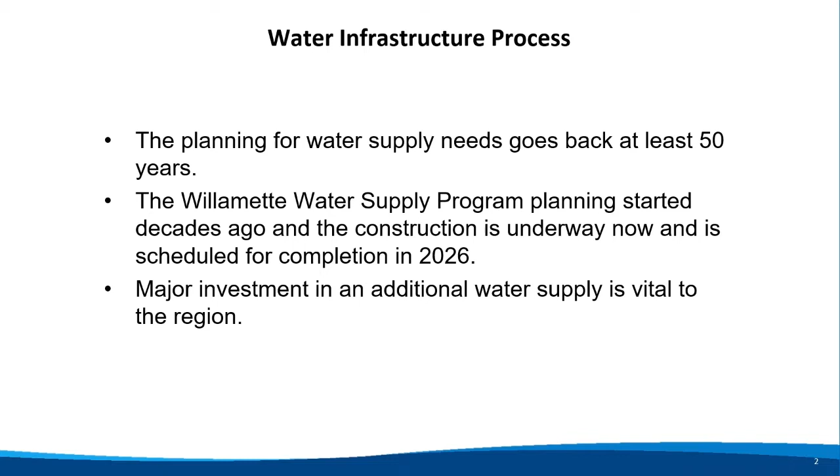Of course, one of the big surprises delivered in 2020 has been COVID-19, and that has been and is going to continue to put pressure on us at the individual, household, and community level. The benefit of having partners in a project this size is shared risk, and we are working closely with the City of Hillsboro and the City of Beaverton to respond to the challenges COVID-19 has presented.

COVID-19 has largely impacted our water sales and thereby our revenues. So while we've had a lot of benefits in the re-executed WIFIA loan, the reduction in revenues as a result of COVID-19 has been and continues to be problematic, and an unforeseen situation that I don't believe any of us could have envisioned.

The board of directors and the staff take their jobs very seriously, including our fiduciary responsibility of spending public dollars. We recognize that the events which stacked up since last March have placed significant strain on our economy and have put many of our customers in a very difficult financial situation.

We have taken many actions to reduce our expenditures at the district while preserving our ability to move forward with projects that put us in a strong position in the recovery. To date, we have reduced our expenditures in this budget cycle by approximately $10 million. All of the leadership and board of commissioners is working to reprioritize our investments in the district's budget.

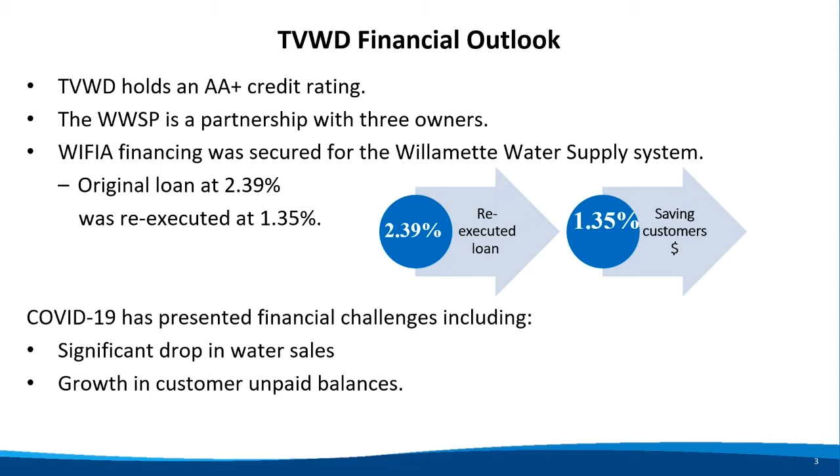Currently, about 1,800 customers owe $768,000 on their water and sewer bills.

We recognize these are difficult and uncertain times for everyone. We are doing all we can to ensure we can continue to deliver water to all of our customers at the lowest possible cost.

While no one is excited about the need to do rate increases, it needs to be understood that the increase is needed to pay for the Willamette water supply program that we can't stop due to numerous contractual commitments made long before COVID-19 hit us the way it has.

The Willamette water supply project remains and will remain for several years to come the biggest ongoing cost the district faces. And while it is never popular to raise rates in any industry, it is important to maintain perspective.

This natural resource is being delivered to your residences and businesses 24 hours a day, 7 days a week, at a cost of about 1 and 1/4 penny per gallon. There is no other natural resource delivered to any of us at such a low cost.

At this point, I'm going to turn this presentation over to professional engineer David Kraska, who is our project director for the Willamette Water Supply Program. David brings decades of experience and a wealth of knowledge that is needed to successfully deliver this large investment for the district, for the region, and its partners. Take it away, David.

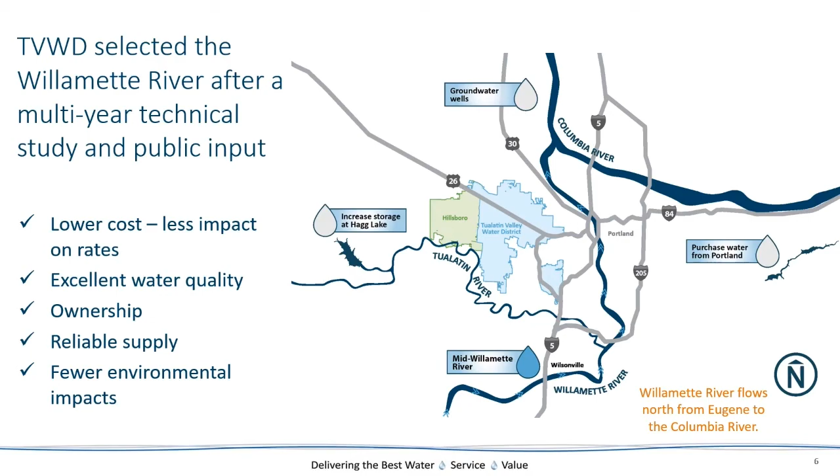Once the decision was made to go to the Willamette River, we had to create what the program entailed, essentially all the different component pieces of it. This is a very high-level summary of it.

There's an existing intake to the Willamette River that supplies water to the Willamette River Water Treatment Plant. We are currently modifying that intake, expanding it and making it more seismically resilient. We're also going to be constructing a new water treatment plant in the eastern portion of Sherwood, right up against Southwest 124th Avenue.

We'll be constructing more than 30 miles of large diameter pipeline. The largest diameter is 66 inches and the smallest is about 48 inches. We'll also be constructing 2 water storage tanks, pretty large tanks, 15 million gallons each, up on Cooper Mountain. The total estimated cost for this whole program is about $1.3 billion.

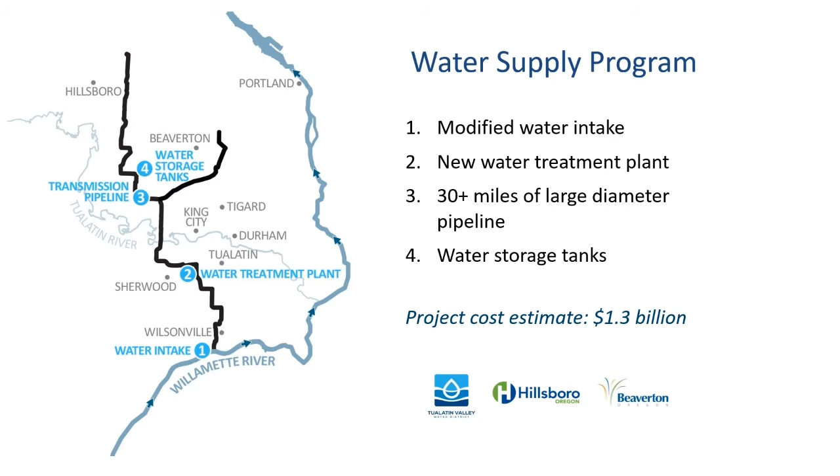One of the most important is maximizing competition on our contracts. For all of our design contracts, all the consultants we hire, all of the construction contracts, we try to make it so as many different firms can compete for our work as possible, because we think that's critical to drive costs as low as possible.

Some techniques we use: right-sizing the projects to make sure we get as many contractors bidding on our work as possible, outreach to make sure as many contractors as possible are aware of our work, and quality designs to make sure the designs we put out for contractors to bid on are high quality, clear, unambiguous, so contractors know what they're in for when building our projects.

We also employ continuous value engineering through the whole design process and also during construction, constantly looking for ways to get the same value and results at lower cost. Commodities tracking, tracking steel, concrete, and timber prices, to find out if we could take opportunities for dips in prices.

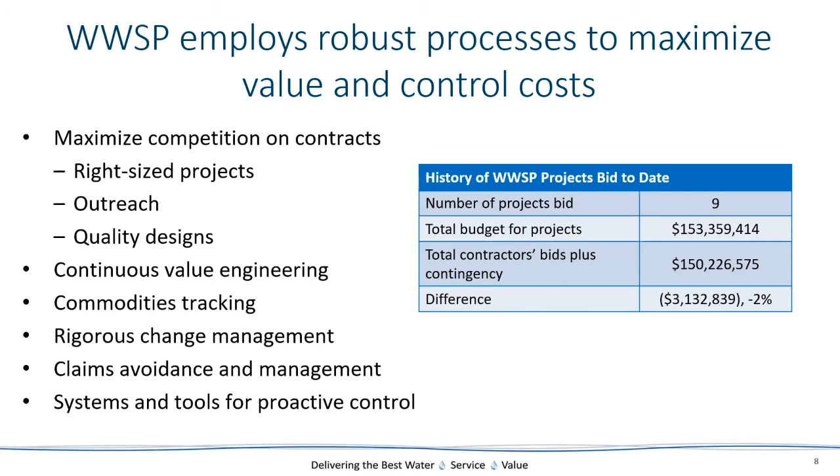So what are we doing on the program? We're building a secure drinking water system. What we mean by secure is secure from a public health standpoint, making the highest quality water we can with available technologies, and protecting that quality all the way to the connections with distribution systems. Secure also means secure from seismic effects and other natural consequences, so the system is reliable even after those events. We're preparing for the future to make sure the system lasts a long time and can be expanded, right-sized for the time.

And improving our economy. This is another thing TVWD CEO Tom Hickman mentioned, all the jobs this work creates and will continue to create.

Finally, water conservation will continue to be a priority. That might seem counterintuitive for an agency in the business of selling water, but if we weren't in that business, we'd have to build an even bigger program. So conservation is a continuous priority for us, to make sure we're making sound use of the resources available to us.

So regarding supporting our economy, what does that mean? To date we've spent about $200 million, and 95% of that has gone to local employees, goods, and services. The pipeline being constructed here is from Northwest Pipe's fabrication facility in North Portland. Almost all the pipe installed on our program has come from that local facility, and all the contractors, many consultants, subcontractors and so on that we've employed are local.

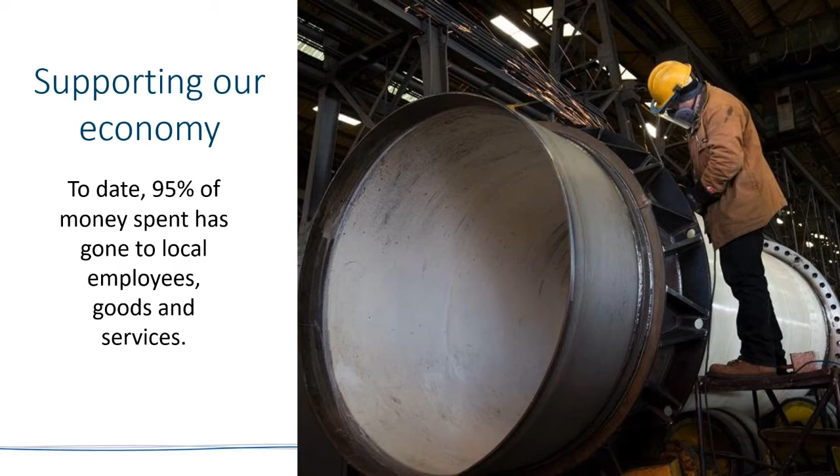That brings me to the end of my presentation. I'd like to introduce Andre Tolman, our construction manager for the overall program, overseeing all the construction work going on to date. He'll bring you up to speed with what's happening now. Take it away, Andre.

Thank you, Dave, and good afternoon everybody. I love talking about construction, so we'll see if we can get through this efficiently.

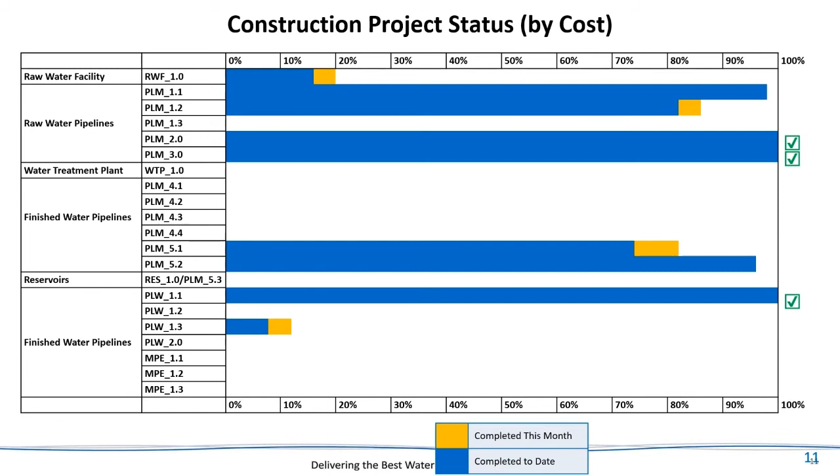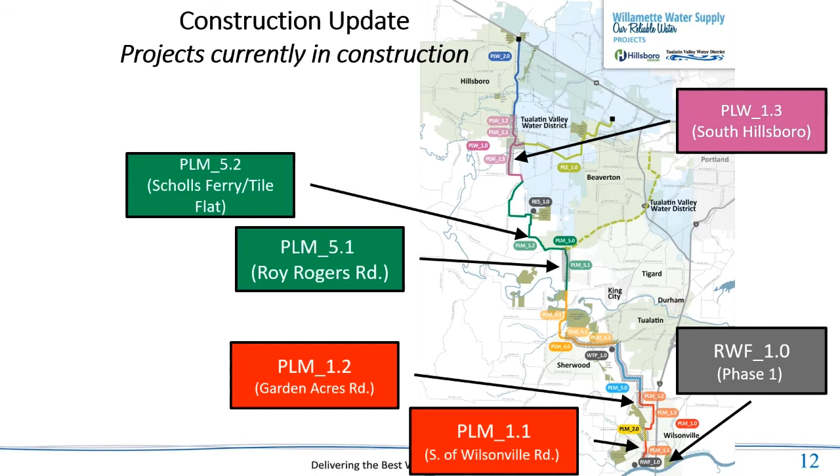The first project I'll talk about is the raw water facility project, known as RWF 1.0. The contractor is Kiewit Infrastructure West, designed by Black & Veatch consulting engineers. The total construction cost for this phase 1 project is $49 million and change. The schedule shows it started in June of last year and will continue through February of next year.

The major activities for this project include seismic soil improvements at the existing pump station, foundation piles for all the new structures, a 66-inch raw water pipeline through this site connecting to the future raw water pipelines, as well as structural modifications to the existing pump station. I'll talk more about some of these activities in the coming slides.

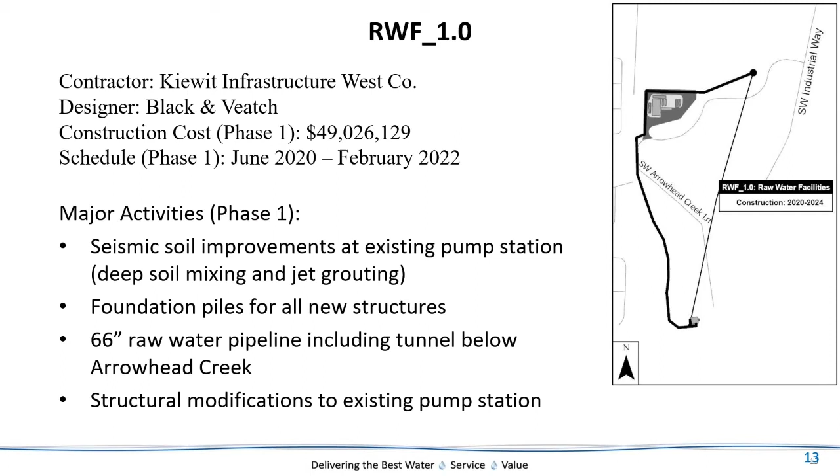All right, so we all like photos. Here's a good photo of the part of the project known as the upper site.

That site where you can see those cranes and most of that activity will be a future building that houses all of the electrical and mechanical equipment needed to run the pumps, which will pump water from the Willamette River up to the treatment plant for treatment.

On the right side of the photo, you can see two very large, tall, yellow drill rigs. Those are drilling shafts for a tunnel that the pipeline will go under beneath Arrowhead Creek, which could not be done with a typical open cut method. Next slide.

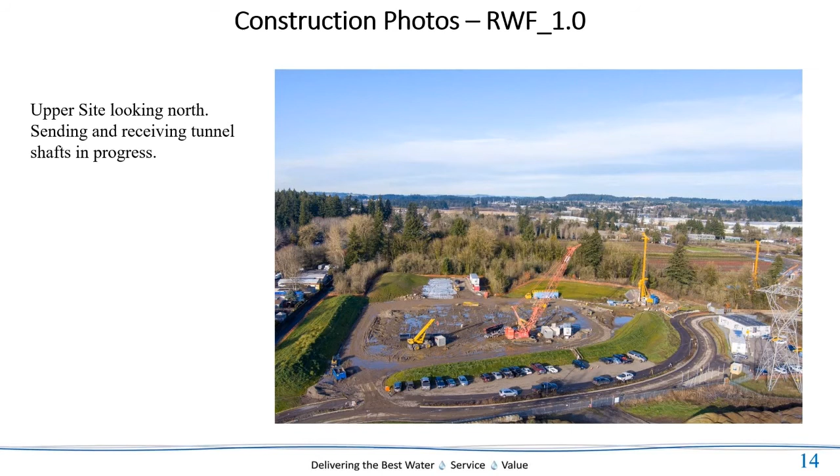In an earthquake, a very large seismic event like a Cascadia subduction zone earthquake, it's expected that this riverbank, because of the slope and the soils there, might tend to slide towards the river, and it'll destabilize all of those pumps inside and potentially shut them down.

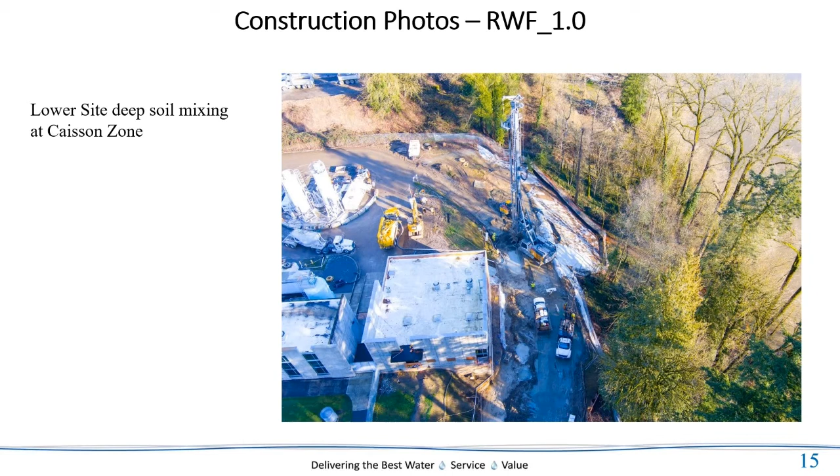So what's being done on this project is this deep soil mixing, improving all of the soil immediately adjacent to that pump station by mixing in cement into the soil, so that it really limits the amount of movement that slope will have in a seismic event. Next slide.

Now I'm going to move up to the next project. It's called PLM 1.1, one of our pipeline projects. It actually connects onto the end of the pipeline from the raw water facility project down in Wilsonville, just on the other side of that creek where they're tunneling.

You can see the contractor and designer information there. It's a little smaller project at $2.7 million, but it was important to get this project done in this time frame of 2019 to 2021, because the city of Wilsonville is building a road and doing some other sewer and water work in this area, and we wanted to make sure we didn't conflict with those two construction projects at the same time.

This project basically includes the 66-inch diameter raw water pipeline, another crossing of a creek, Coffee Lake Creek. This one was done by open cut rather than a tunnel. We had to cross below BPA power lines, high voltage power lines, had to cross below another large water line, a 63-inch water line that feeds Wilsonville and Sherwood, as well as repair some concrete road panels. So a smaller project, but had a lot of technical challenges to it.

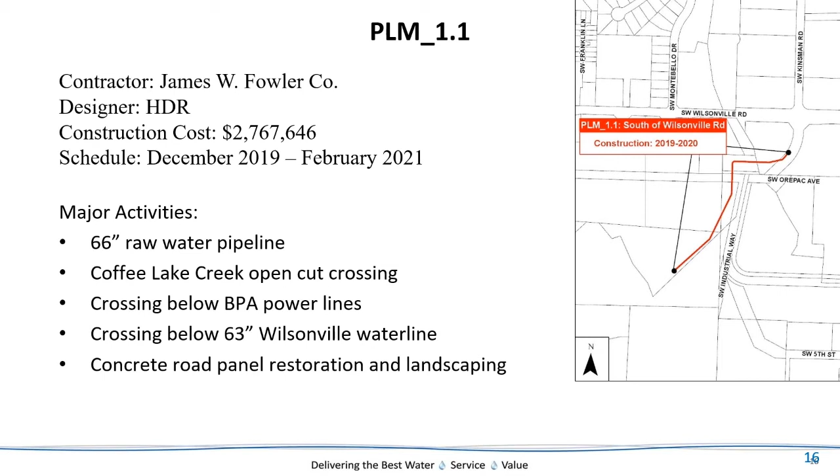Here's a photo of some of the activity on the site. Down in the foreground, you'll see that creek - that's Coffee Lake Creek. During the summer, the contractor was allowed to put a small dam in there and pump the water around. Back in the summer, the water level was much lower.

And so there was an in-water work window to protect aquatic life in that creek. They actually trenched down about 20 feet below what you can see that water level there in the dry, and put the 66-inch pipe underneath that creek, and then crossed that road by going halfway across and bypassing traffic, then moving traffic back over and continuing on.

So a lot of technical challenges were involved in this project. Next slide.

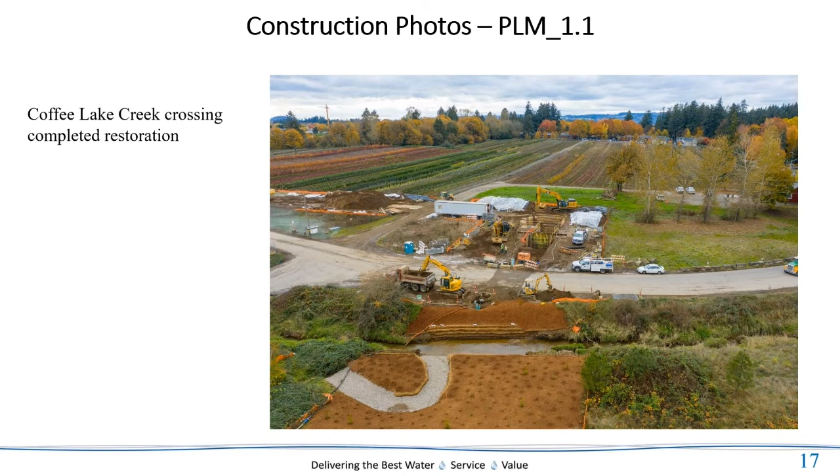Again, here's just an overview of that kind of 1,300 feet of pipeline. You can see it went through this nursery area and the existing roads. Those roads are used by Wilsonville Concrete and Orepac, a major building material supplier. So there was a lot of truck traffic that had to be negotiated on this project.

But as of now, it's all restored and headed towards final completion here next month. Next slide.

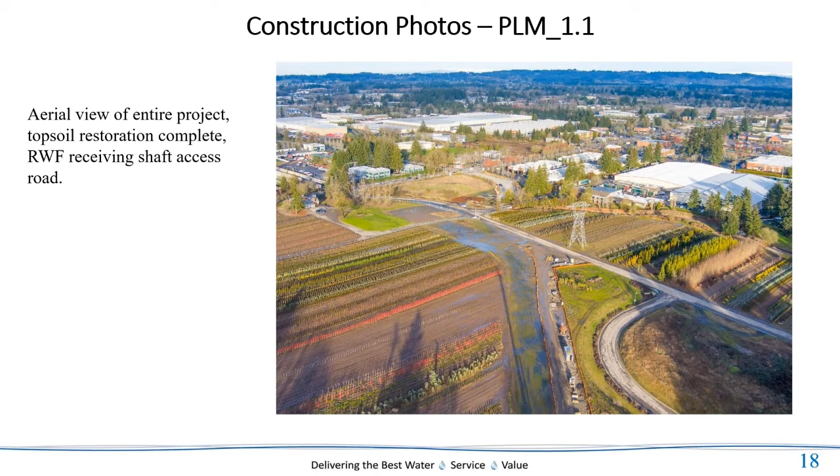Now this project is called PLM 1.2. This was a partner project, and you can see on the top of the slide we list a partner, City of Wilsonville. So the city wanted to build out Garden Acres Road.

It was a very narrow country lane, and as the city planned for more development in the area, they wanted to widen this road. So knowing that our very large 66-inch pipeline had to go through this area, we partnered with the City of Wilsonville to have one construction contract where the pipeline and the road construction could be done at once. This saved both agencies quite a bit of money.

The major activities on this project include the 66-inch raw water pipeline, and another tunnel below Day Road that can't be done open cut because of other utilities in the roadway and traffic concerns. We're also tying into the PLM3 pipeline, which was done back from 2016 to 2018. And then what we call Schedule A road work, that's all the street work the City of Wilsonville was having done.

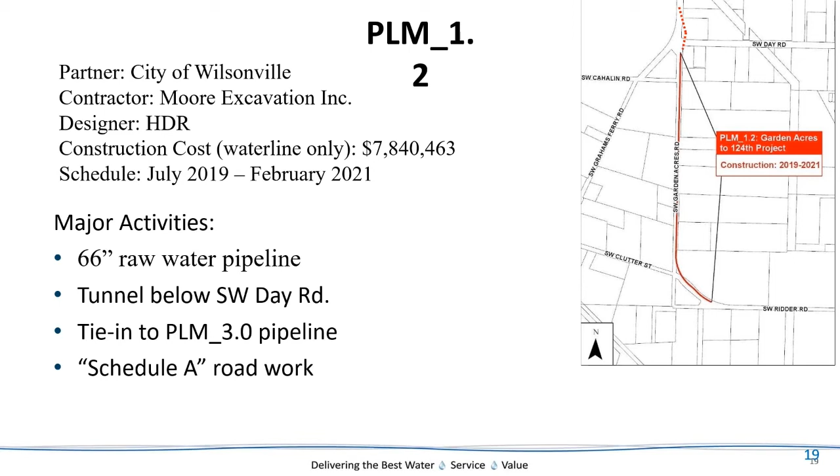Here's an overview of Garden Acres Road. As you look at this photo, you'll see that light gray concrete pavement - those are the limits of the road the city wanted to complete. There's the land that will someday be a light industrial development in Wilsonville. This is what's known as a half street improvement, so it'll eventually be a wider road, but for now there's 2 lanes, planter strip, sidewalk, bike lane, etc.

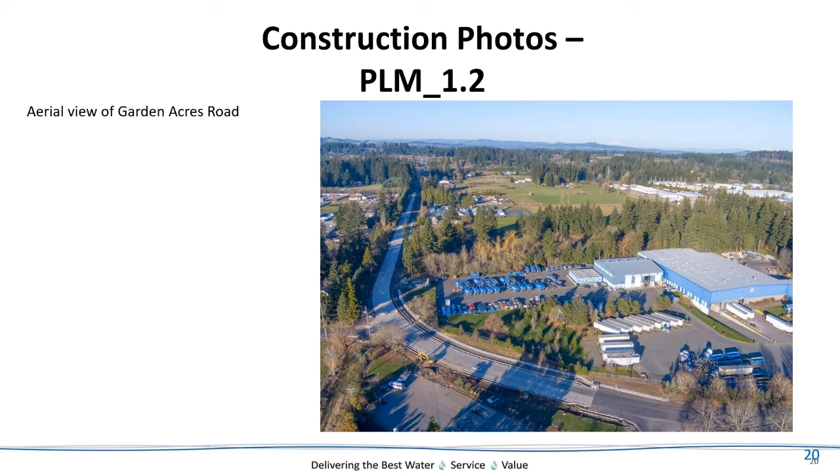This makes it quite evident why it was important to get the pipeline done before the road was built, so we wouldn't have to come back later and tear up existing pavement. It was a good move for both agencies to save money, doing it under one contract where we only had to pay one contractor and the associated overhead and disturbance to the public.

Now here's a photo of our 66-inch water line going in. You can see it takes up quite a bit of room in that road, and this Garden Acres Road really was a small lane that's getting widened out. The shoring and large equipment and the depth of our pipeline is quite impressive, so it takes up quite a bit of area as it went forward.

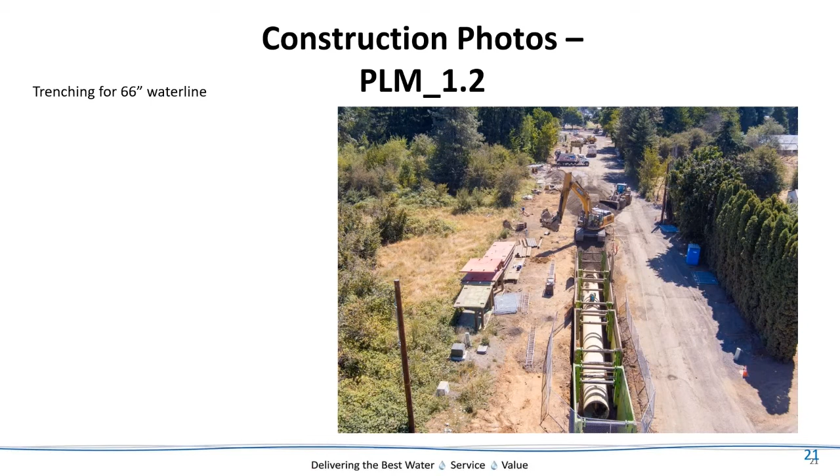As the pipeline got done, the contractor came behind and started grading out and paving the road.

We had another partner project, this time with Washington County. As some of you know, the county is widening Roy Rogers Road. The idea was the same: we would team up and do the project together to save money for both agencies.

The major activities on this project were our 66-inch finished water pipeline, with a T connection for the 48-inch future Metzger pipeline. There was a tunnel below an unnamed water body we call Tributary 3, and another temporary connection to the City of Tigard included in this project, as well as Schedule A, the county road work. Our waterline work is known as Schedule B from the contractor's perspective - a widening of Roy Rogers Road, including a bridge widening over that Tributary 3.

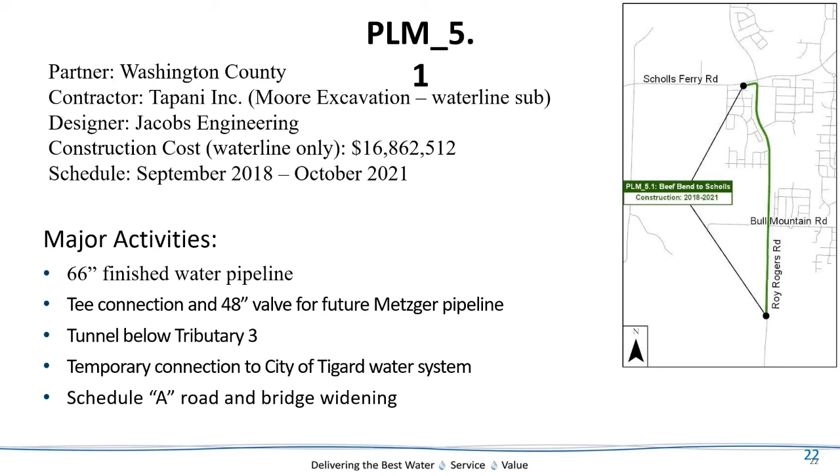Next slide, so we're going to look at some photos. This is an overview of Roy Rogers Road looking north. You can see there's a lot of development happening in this area, a lot of new housing construction, and the widening of the road.

Again, we're putting our pipeline in before that paving gets done. You can see where our pipeline is going in there on the side of the road. Eventually 2 more lanes and a bike lane will be put over the pipeline in that area.

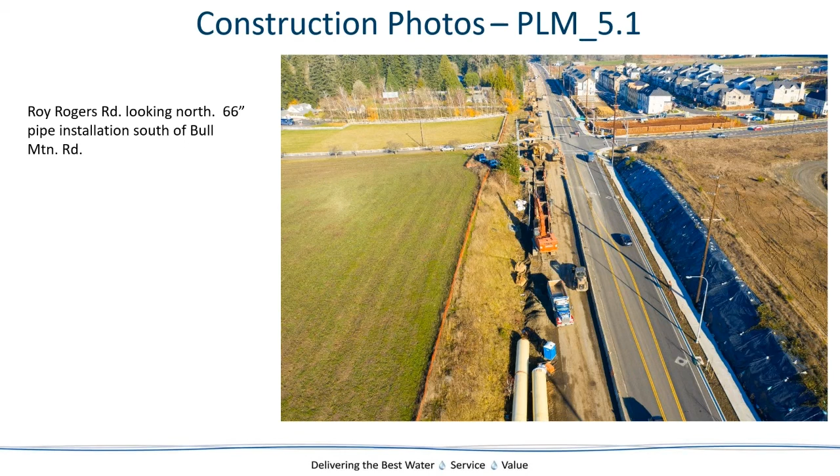This is a photo of the shaft, one of the shafts for the tunnel which went under that Tributary 3. It sounds pretty insignificant, but it was a very deep valley with a creek down at the bottom, so there's really no way to do it digging from the surface. We had to do a tunnel under that creek.

This shaft you see here is called a secant pile shaft. Essentially, the contractor drills in those little circles of concrete all the way down 60 to 70 feet. When they're all connected together, it forms a compression ring, making it safe to go down to the bottom and work in there. So they excavate all the soil out from inside and then put their tunneling equipment down at the bottom, doing the same on the other side so the tunnel equipment has a place to exit.

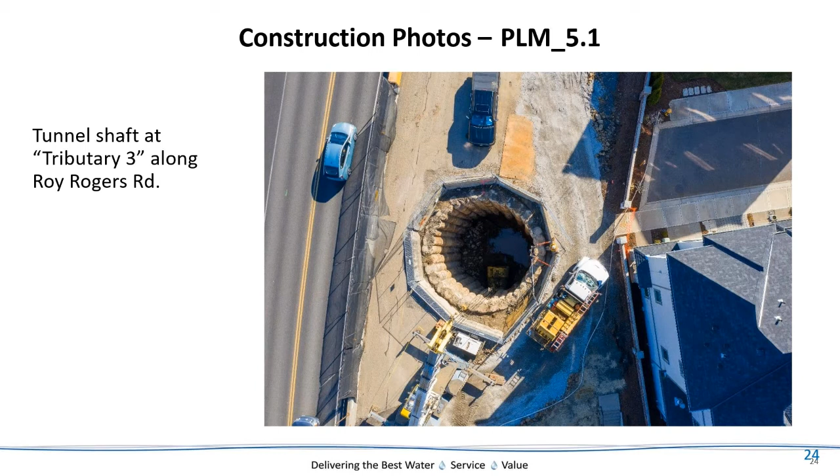Moving right along to our next project, PLM 5.2. The little map graphic shows where this is. It's on Scholls Ferry Road and Tile Flat Road, and then a little bit onto Grabhorn Road.

This project is nearly complete, about 99% done. The schedule shows it ending February of 2021, next month. The major activities were the 66-inch pipeline going in for our finished water, and there was another shorter tunnel below Scholls Ferry Road, along with a lot of coordination with developer projects.

This project had to be done in 2019 to 2021 because this area in Beaverton is within the urban growth boundary, with a lot of future development and some current development happening there. We had the opportunity to put in the 66-inch pipeline across some fields where there were no traffic impacts and no current development. If we waited a couple of years, that would have been much more difficult and expensive. Next slide, please.

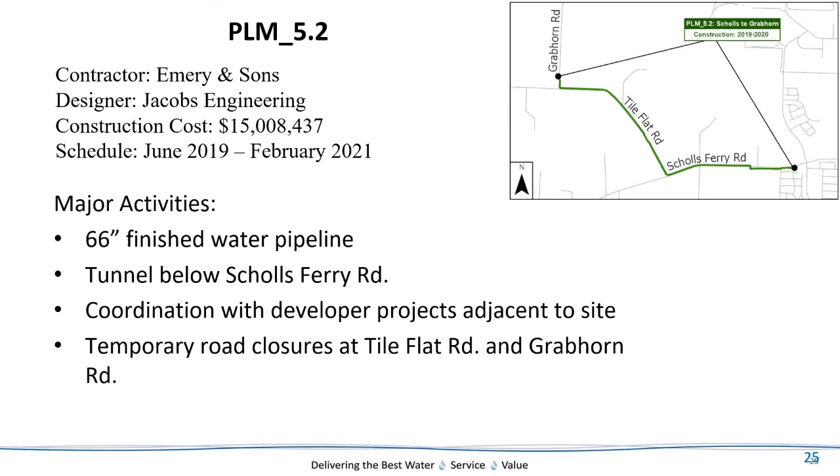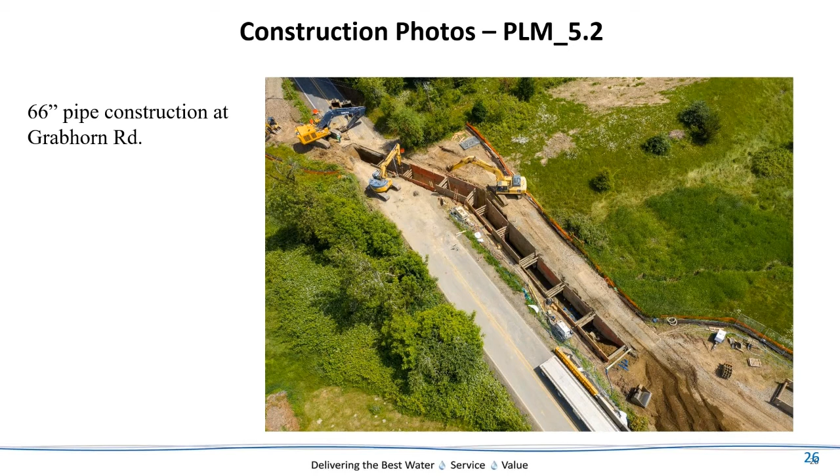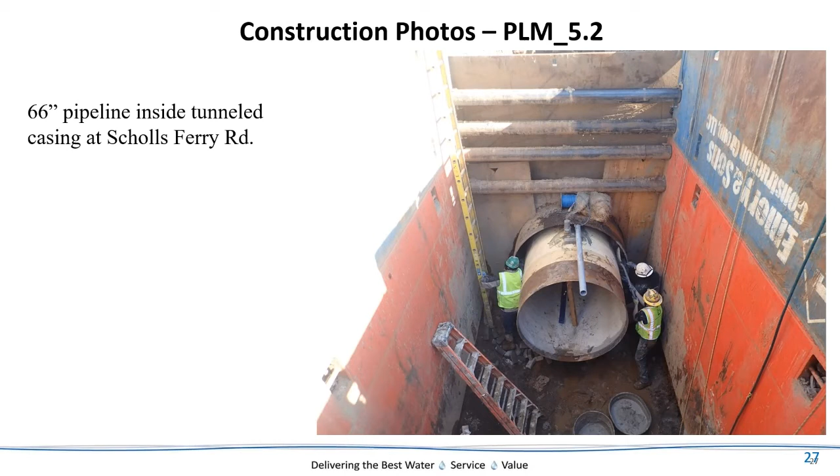Here's one of those tunnels I mentioned - what it looks like when you look down in the bottom of a trenchless tunnel. This one was going underneath Scholls Ferry Road. It was only about a 100-foot tunnel, but essentially they push in a steel casing and auger out all the dirt inside that casing as they push it forward. When it reaches the other side, they dig a shaft or a pit as shown here, then push in our yellow pipe, that 66-inch pipe, and slide it inside the casing. Then they typically grout around that void, the annular space, to fill it and keep the pipe secure inside the casing.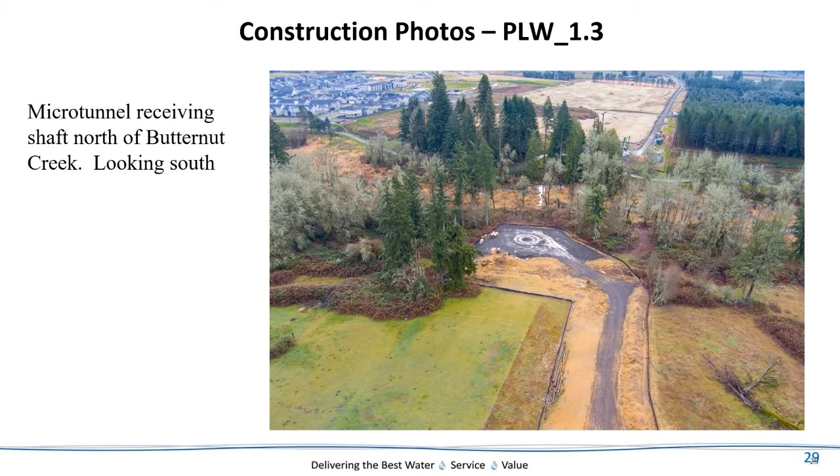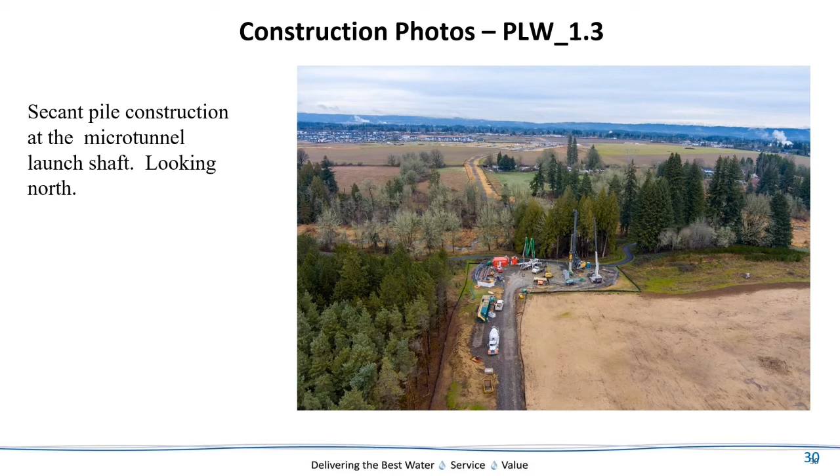Let's look at the next slide, which shows a photo from the other side of the creek looking north. As you look north, you can see again an access road built by the contractor. That's sort of the future Cornelius Pass Road alignment in the South Hillsboro area. Off in the distance, you can see South Hillsboro and some steam rising there from what looks like the Intel Ronler Acres campus. Down in the front of the photo, you'll see that's drilling out one of the tunnel shafts.

So those are the projects currently in construction. Now 2021 is going to get even busier. We are bidding 9 new projects this year, all the way from Hillsboro down through Beaverton and Sherwood down to Wilsonville. So a lot of activity coming up. We bid a couple projects starting next month, and it seems like every month we're putting out a new job to bid. So the amount of construction is really ramping up, and it'll be an exciting time moving forward.

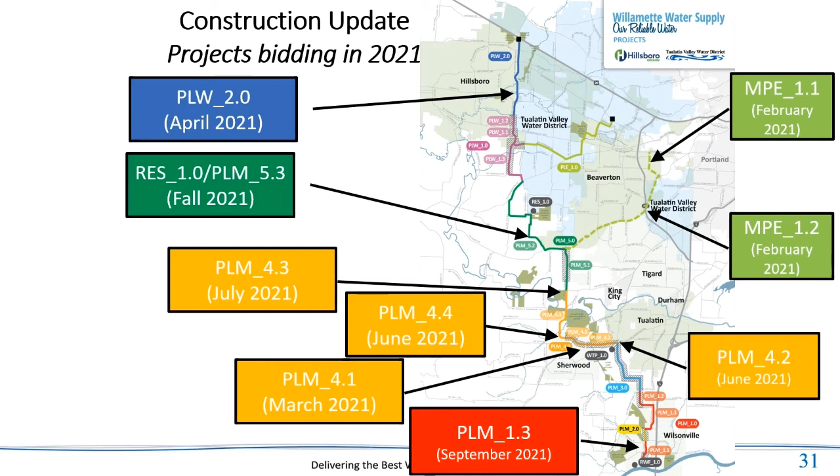I think that's the last slide, and we'll leave it open for questions.